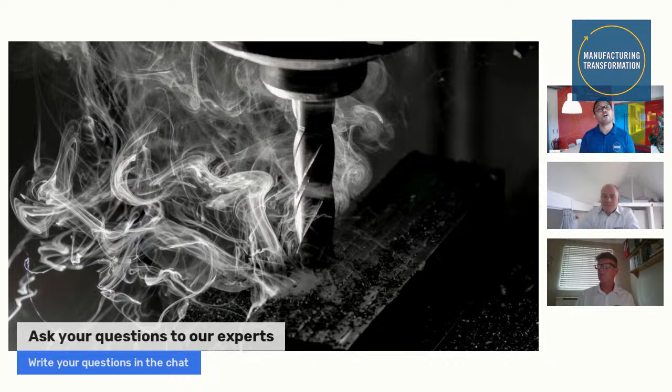And why? Because the market situation, competition, and most important, your end customers are asking for it. So first, let's try to understand how to identify some of the important issues while you're manufacturing complex parts. So to begin with, from my experience, I would like to share 4 important recurring issues while machining complex parts.

So nobody likes to see smoke while you're machining complex parts. Let's get into the issues as quick as possible. So the very first issue that I've identified is not meeting expectation.

Focusing on the machining process or the entire manufacturing process, we have a number of stages, right from the design department developing a CAD part and then handing it over to the production engineering team, where they would do the programming, defining process and then programming, and also make sure that they post the right codes to the machine and finally cut the first part. During these different stages, we have to make sure that there is something called the trend knowledge that is required to fill the gap. Sometimes we are adapting the traditional knowledge or methods for machining complex parts. That could be one of the major reasons for not meeting your expectation.

As I mentioned about different stages, if you are not making a connected process, not bringing that agility, a very obvious issue that I've observed is a lack of efficiency. This is a very common issue when we don't see connectivity between these different stages.

And with today's pandemic situation, everybody is under a lot of pressure to control cost. Your customers are also looking for the technologies that they would have looked for after 5 years. I think this is a time everybody realized that we have to adapt this quick technology now. And with these pressures, the cost is becoming one of the main factors for every shop floor.

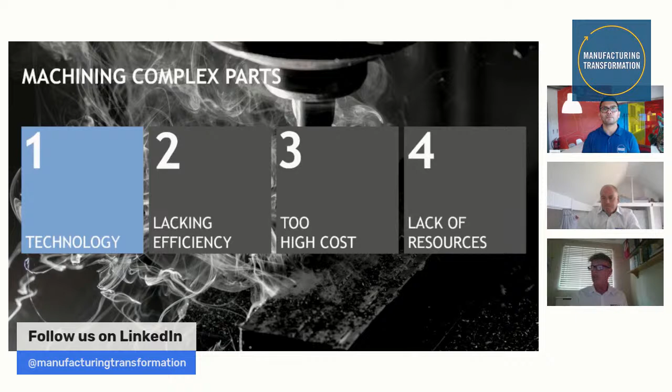Very interesting point. Thanks, Neil. And I think that summarizes that you need to have the right technology to drive the complex part. And I think it's very important to understand, as we have this kind of knowledge available in the market, and at the same time we have this issue called lack of efficiency.

So now I straight away move to Jason. So when it comes to machining a complex part, how important is it to identify this issue, and what is your recommendation to overcome this lack of efficiency, Jay?

Thank you, Janardhan. Obviously, make the process more efficient. What we're really talking about is optimizing your process. There are many ways to do this. And I suppose the main two for us that we drive for is reducing cycle times and reducing the number of times the operator has to intervene inside the operation.

So by doing this, that can lead to much more robust and stable operations and conditions, which leads to better parts. And if we reduce the cycle times, it also creates more capacity. And the more capacity you have, the more space you have for future developments as well, to improve those tool paths and those setups even further.

But it also gives you the capacity to take on more work, so you're making your business more revenue. And part of this whole process of optimizing the process is by working with our technical partners, so we're using all our knowledge together to get the biggest gains.

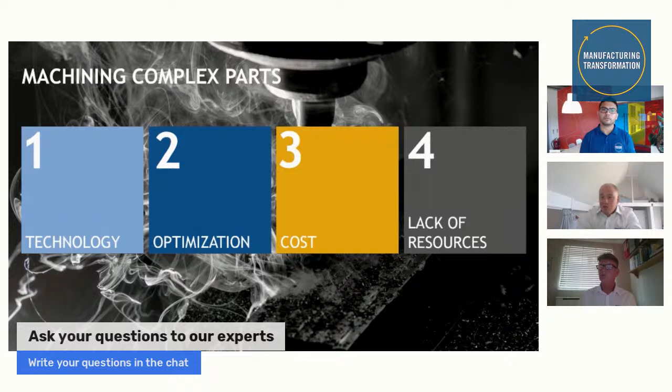And one of these known types of machining techniques nowadays is dynamic milling, and that's where we're using the full length of the tool to actually machine out pockets and areas that are hard to reach at a much higher feed rate, but obviously making full utilization of the tool as well. So yeah.

Good, good. Very interesting, because this plays a very important role in today's shop floor, how to really balance this, focusing on what kind of activity, whether it is pure optimization or optimization included cost control as well.

Thank you, Jason, for helping us with your information. Going forward, addressing one of the important recurring issues, that is lack of resources. I'll go to Neil and ask you this question: what is your recommendation to our audience and customers on how they can find the right resources with today's situation? What are the different ways? Can you help us with your ideas?

Yeah, it's a good point, Nard. I think in the market nowadays, with the customers that we deal with, they have limited resources. They're very busy, working on projects, and relying more on tooling providers like us to develop their processes. This helps them reduce their machining issues. We're collaborating on projects, providing robust machining strategies, and lowering the risk of their persistent manufacturing issues. I think the customer looks at us as an extension of their team, which leads to opportunities for both parties.

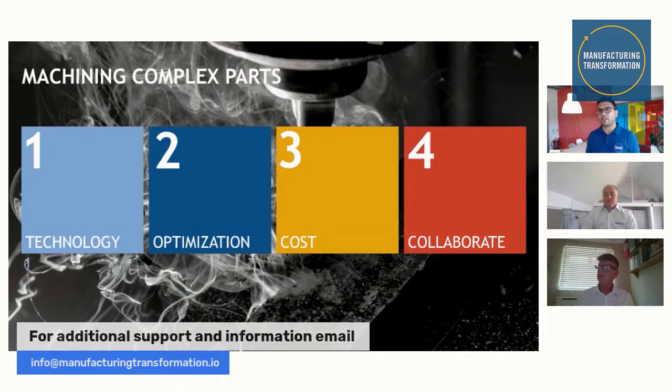So I think if I want to summarize all these 4 points in 3 simple words, considering the key elements Jason and Neil told us, we have to be very agile, quick enough to identify this knowledge available in the market from the source, and also adapt it as quickly as possible. You have to be flexible to adapt these kinds of trending solutions. And most important, not just by identifying, you have to authenticate it from the right resources. As Neil mentioned, you need the right technical partners to validate the knowledge you want to apply on your shop floor when dealing with complex parts.

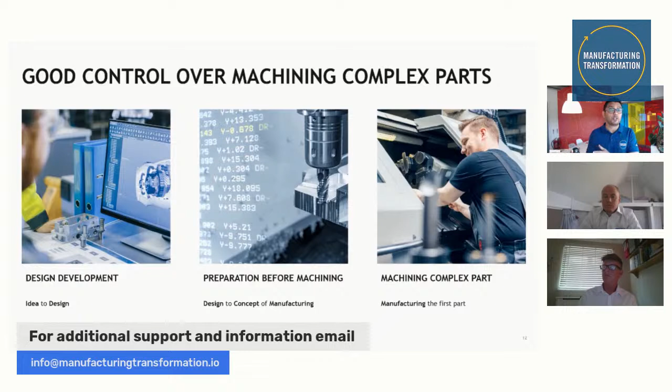I think moving to the next interesting point for everybody is to have more good control on the shop floor, because there are three very important stages in your shop floor when dealing with complex parts. One is the design department developing the CAD part, and sometimes they don't consider where it would be manufactured. The second very important stage is the preparation for the actual manufacturing activities. And the final is seeing the first part when it cuts, and that wonderful part coming out of the machine.

So here, my question to Jason: what is your experience as an engineering manager and team member of your Innovation Hub team? What are your recommendations for the audience on the areas they have to prepare and consider before they start this activity? Could you help us with your conditions?

Absolutely, you've just mentioned it there. For me, the first point is design for manufacture. You sometimes see parts or features designed where the feature is very difficult or almost impossible to machine, and that could be alleviated right at the start by joining the design team up with the manufacturing team. By doing that, you resolve those issues far in advance of starting this process.

But once you do have that component or feature, you've got to know all your inputs. You've got to control all those variable inputs to know that your output's going to be correct. Things like your machine tool - we need to know the exact setup: is it a 3, 4, or 5 axis? How powerful is the spindle? How quick can the spindle run? We need to know the material - without the material, we can't select the right tools or the right cut data.

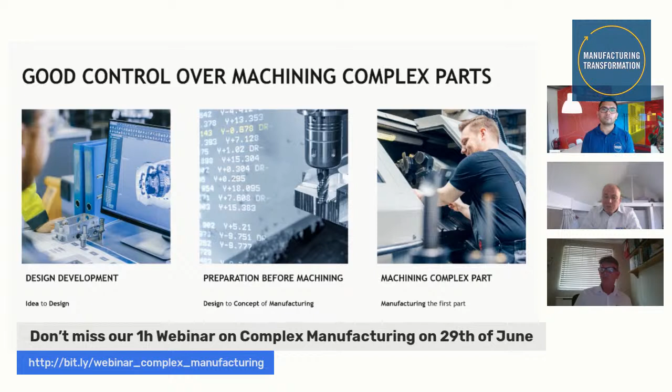And once we're at the point of machining and we're doing our first prove out, it's very important that we're actually stood there with the customer to make sure that we can hear, feel, sense what's going on in that process, in that part where the tool's hitting, so that we can make small adjustments, minor adjustments at the time to best suit the actual setup that you've got in your factory. And then only when all that is done and we've completed all that can we have the best possible chance of having the first part off right first time.

It's very interesting when you said about hear, listen, and feel about what's happening in the process of machining. I think that's where the experience and the skills and knowledge comes into play. So people like you, who have vast experience. So I think this is the understanding that we have to give to today's shop floor, that it's not just okay to apply the traditional methods that you know from different ways, but you have to make sure to apply the right knowledge.

Thank you, Jay, for that wonderful summary of the stages and control points that you've recommended for the audience. And moving to the next stage, I want to summarize to the audience. And before summarizing, I would also request, if you have any questions, please feed into the chat, and we'll make sure to answer by the end of the session.

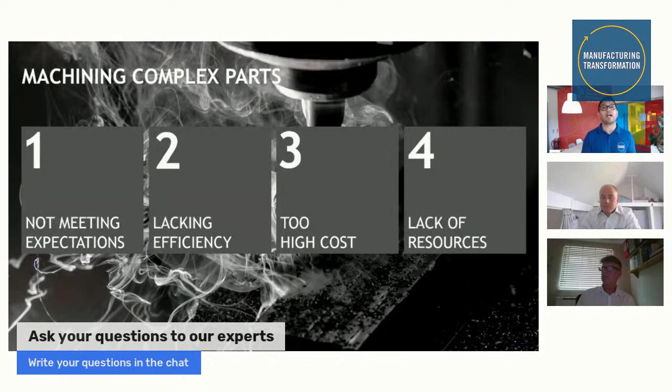So going quickly on the summarizing, just on the recurring issues and the key elements that we spoke about today. Make sure that you may have these kind of hidden issues in your shop floor while you're manufacturing complex parts. So make sure to find it out and get the right source to address these issues, by getting these right elements from the right technical partners.

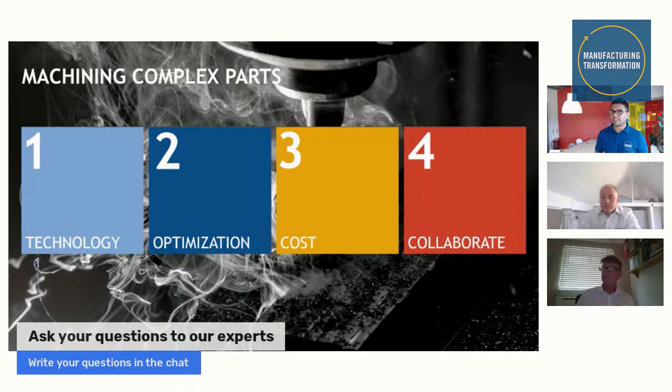It is very important, one of my favorite quotes that I always remember, because everywhere we hear about knowledge, a lot of people are organizing webinars and sessions, everybody talks about it. But at the end of the day, it is you who have to apply to your shop floor while machining complex parts the knowledge that we are talking about. If you need more support on this kind of knowledge, please get in touch with one of us in the session. And if you need more information, log on to our information center, and then you can get more information about the knowledge that we are talking about.

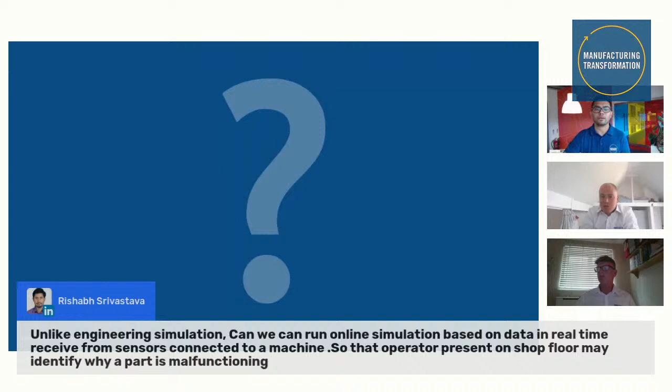So Jay, do you want to add anything on this question? I think you're right. There are two ways to look at this. Offline simulation is more about collisions, making sure the code is correct before it hits the machine. Online simulation is more about the forces being applied, so we're always monitoring the spindle or the X-axis ball screw, and that feedback could show vibrations happening. There are functions moving forward where that feedback loop actually changes the feed or speed through the machining process at the time. That's really innovative and inspiring, that you can change feeds as you're running a part to get a better component at the end.

Yeah, I think that's a great point, Jason. Another point from myself is collaboration with the machine tool builder. A lot of these machine tools, the most expensive part is the spindle, and if we have robust data and tool life calculations we can feed to the machine tool builders, they can set the parameters on the spindle for loads. It's much more important for the tool to be stopped before a collision or before the insert wears out, because you're not damaging the tool, not damaging the component, and not damaging the spindle of the machine. So there's some great collaboration there; we work very closely with machine tool builders on projects, especially when machining super alloys.

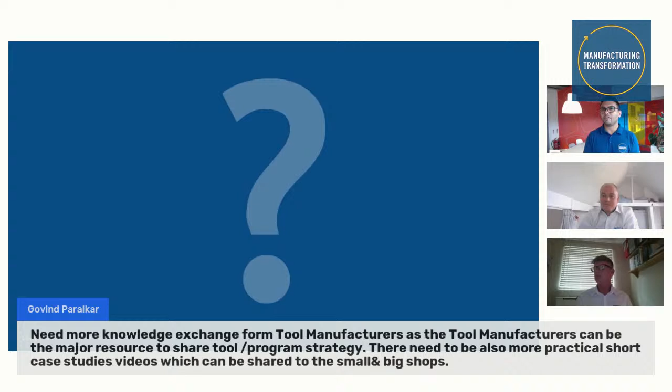Very valid point. That gives me another thought to share: most of the time we just conclude by saying tooling suppliers, but we are developing those tools, so it's more than tools that we can help and support customers with. It's a very right way of understanding where the knowledge is coming from. Really, thanks, it was a really interesting comment.

So moving to the next question, which is a comeback question to Jay, I believe. Thanks for answering the question on superalloy material machining. Could you share technology trends on machining composite material?

Obviously the composites market is fast growing, and we know it's going to be bigger and bigger as the days go on. We have a big development on composite cutters. We did a demonstration last year at our ITI event, showcasing PCD on composites as well as our latest carbide cutters. We're now looking at the next phase: how we can introduce a certain type of MQL, or minimum quantity lubricant, into machining composites that can increase tool life even further. We're always developing, but that's the next stage. It's very early at this moment, but we're seeing some positives in that area.